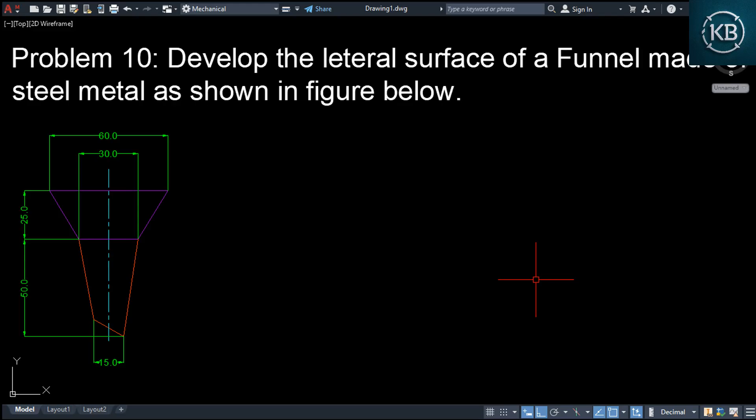Today we develop this funnel. At first we draw the same figure of the funnel.

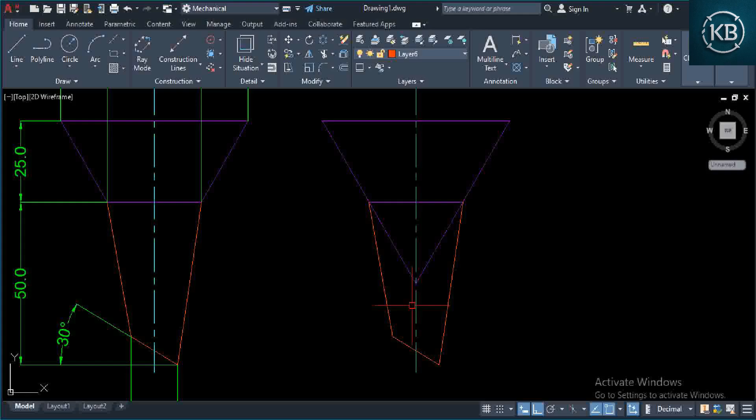Upper part of funnel. The outer side length we extend up to the center point. Then we see this line meet up to the center line. Same with the bottom portion of the funnel, extend the length, and then we see this line meet.

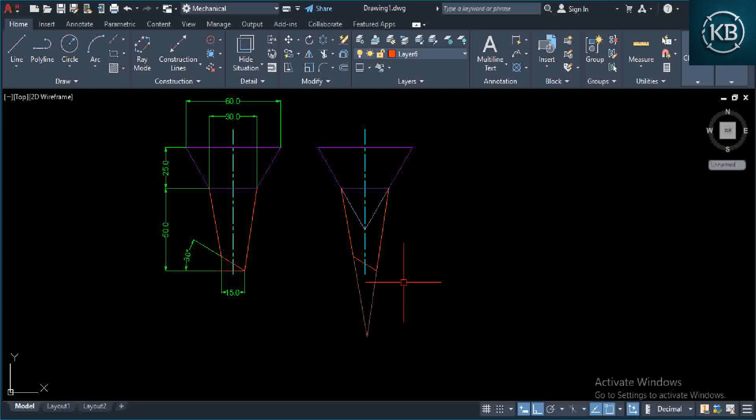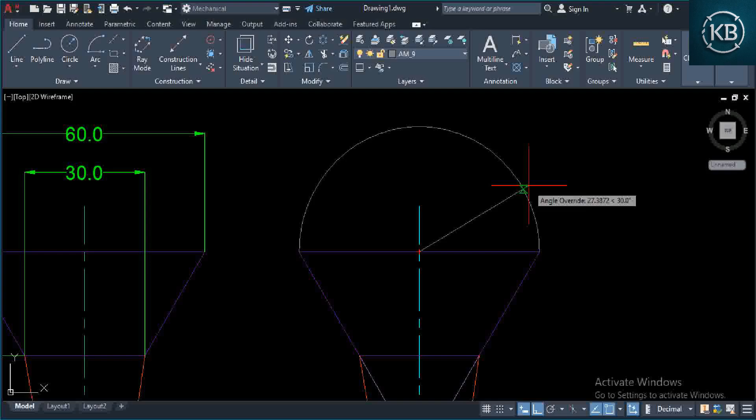Upper portion of funnel, make a semicircle, and divide into 6 parts. Each angle is 30 degrees, and at which point we get, draw a vertical line projection, and this line projection meets this upper portion of the funnel at the vertex point.

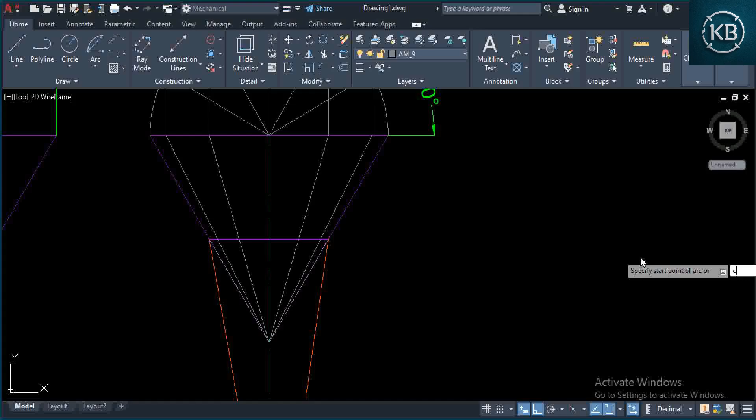Then measure this length of the upper portion, then make an arc on the outside of the figure, and join one point of the circle with the center point.

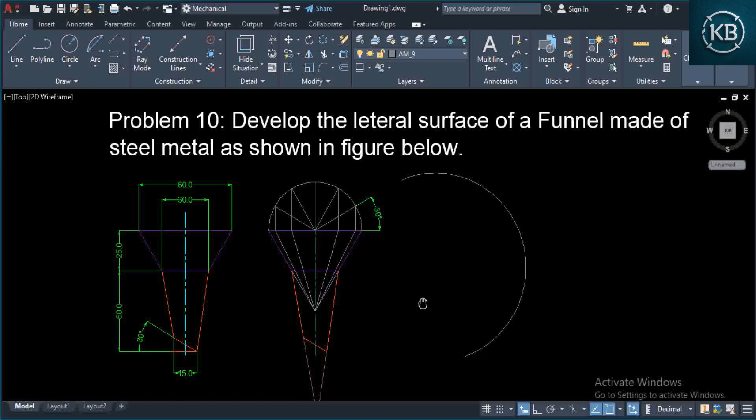Measure this length of funnel part A and compensate on the outside of the arc at the center point and make an arc.

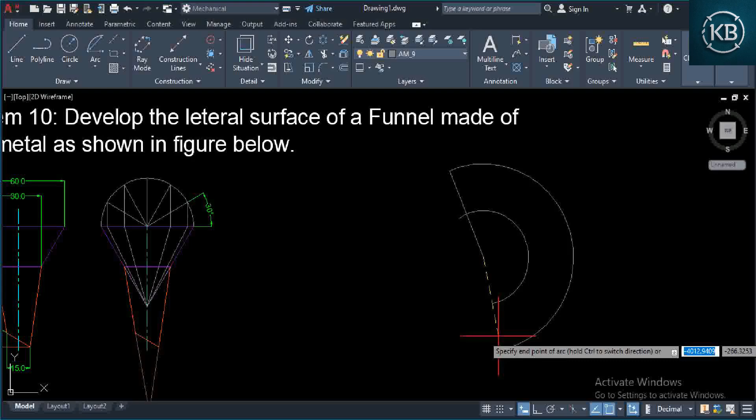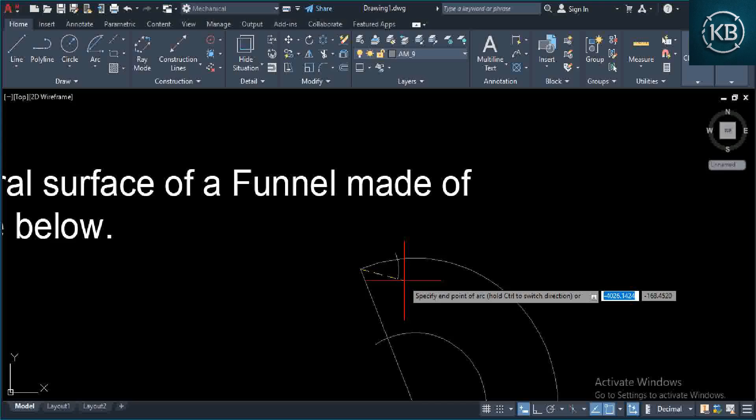Then measure this point with the compass and compensate on the outside of the circle and make an arc as you saw in the video. Then draw another arc of the circle.

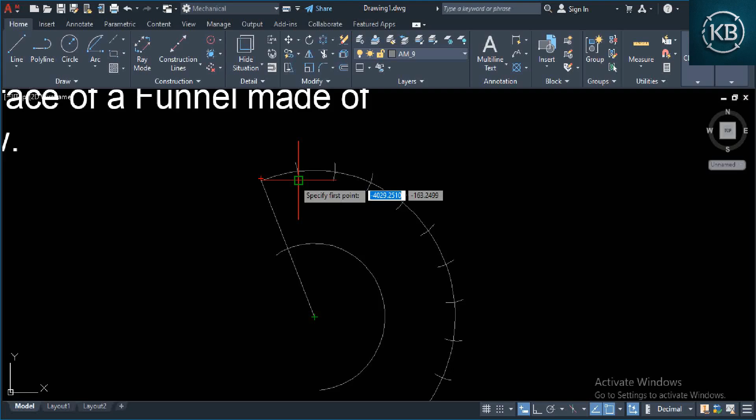And join the line. Same way, draw the development in another part of the funnel.

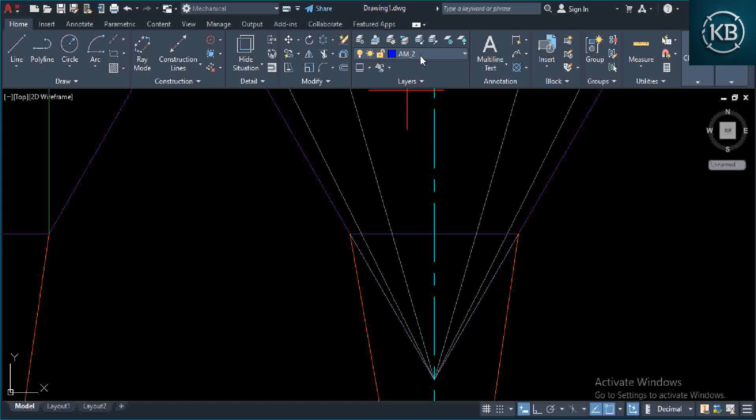Then this line, part B line, draw a semicircle and divide into 6 parts of 30 degrees.

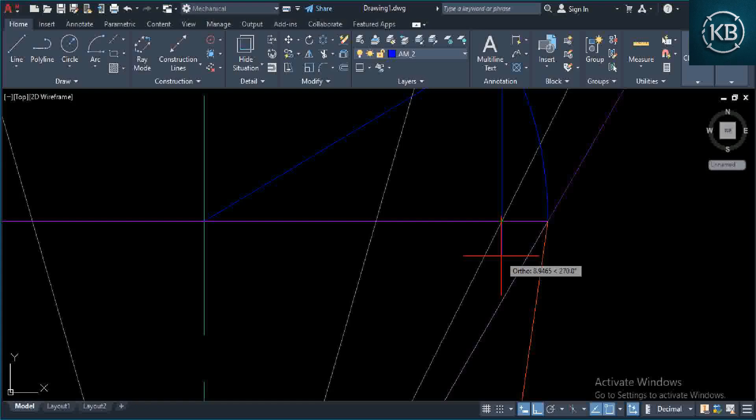And this line draw vertically. Then we see the previous drawn straight line meets. Then we draw the line.